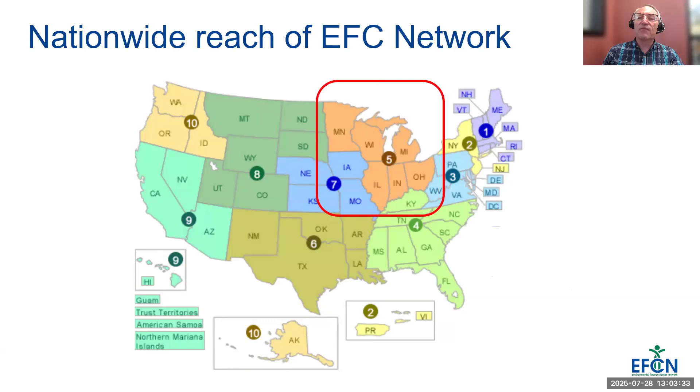This is part of a nationwide project, a collaboration between all of the environmental finance center networks, most of which are university-based, and they're all across the nation. Each region has at least one environmental finance center, and the Environmental Finance Center for Region 5 is located at Michigan Technological University, and our program is called the Great Lakes Environmental Infrastructure Center.

So what kind of topics are going to be in this scope of water quality in the distribution system? The distribution system, as we know, it's separate from the treatment plant.

However, it is affected by source water and by treatment as well. When we talk about the distribution system, we're talking about storage, mains, pumps, and possibly even wells in small groundwater systems. And we're concerned about protecting the water quality once it enters that distribution system from contamination.

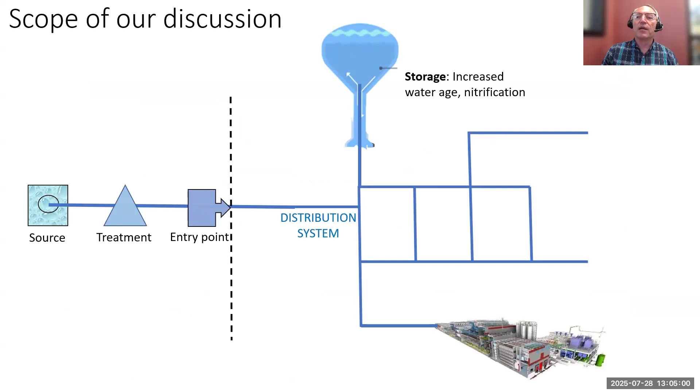If we look at the various types of things that can happen in a distribution system, we can see that we can have things like excessive water age or nitrification in a storage tank. We can have problems at dead ends with disinfection byproduct formation, and also water age, loss of disinfection residual.

In pipes, we can have challenges. We can have things like biofilm growing. We can have corrosion, leaching, and permeation in pipe materials.

There's also the topic of cross connections and backflow that can affect distribution system water quality, but also we're affected by source water quality. And even treatment processes can affect downstream water quality in the distribution system. We can have, for example, treatment give us changes in pH and alkalinity, and different types of disinfection chemicals can affect water quality in the distribution system.

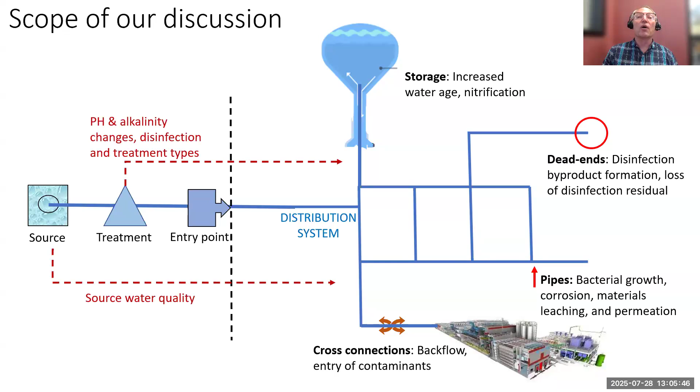Also, water age has a big effect on distribution water quality. And the kinds of things that we can look at is how long is water remaining in our storage tank? Do we have sufficient turnover? Are we flushing our system and working to eliminate or manage dead end water mains? The water quality in the distribution system is heavily affected by water age.

You can see in this little graph on the top right of your screen that has water quality ages, and that bottom graph of time is in hours. The performance index that different people in this study were looking at were things like disinfection byproduct formation, loss of residual, and they were trying to figure out what's a good way to monitor the performance or the quality of the water over time.

You can see that over time, eventually, if you didn't do anything to renew the disinfection residual or bring in new fresh water, that water quality would deteriorate. And it could be a number of hours or a number of days, and it depends on some factors that we'll cover today.

Some factors associated with water age: loss of disinfection residual, disinfection byproduct formation, the growth of biofilms, and interactions with different types of pipe scales. We'll talk about that today. Increase in bacteria counts and development of pathogens, corrosion and tuberculation in pipes.

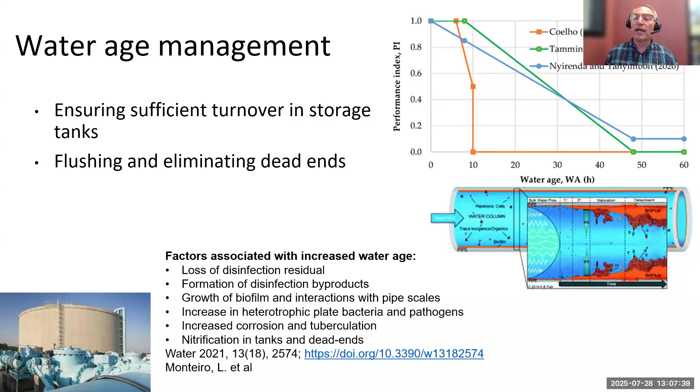Nitrification in tanks and dead end mains. On this slide here, there's a link to that study that I was referencing where that graph comes from up above. You'll have that in your slides.

Another issue is preventing the entry of contaminants, and there's a couple ways that contaminants can enter. It could be through some kind of cross connection where you either have back siphonage where there's a loss of system pressure, which either creates a suction or allows contaminants or unapproved water sources to enter the system, or you can have a situation where there's back pressure, where the customer has some kind of process like a boiler or pumps where the customer pressure exceeds the system pressure. Both of those can lead to backflow.

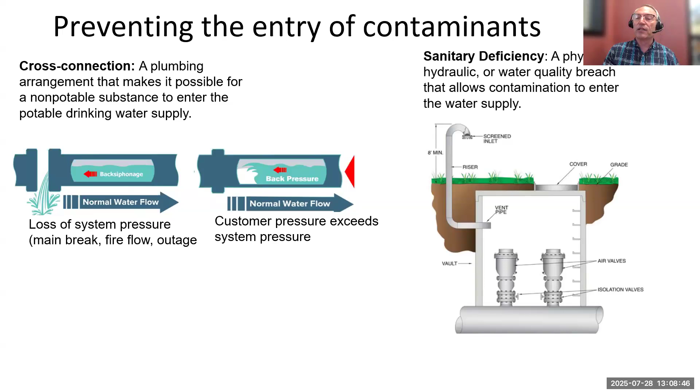Another category, a wide category, is sanitary deficiencies, some kind of breach in the water system that allows contamination to enter. A couple of examples would be air release valves in the distribution system. You see in this image here on the right of your screen, you have a screened inlet that allows air to be released or enter, and that would need to be protected from things like flooding or groundwater. Also, you could have something like a groundwater well that doesn't have an adequately sealed casing at the top or an adequate sanitary seal, which could allow contamination to enter.

There's also some factors with pipe materials. One issue is permeation, where contaminants like volatile organic compounds can pass right through the pipe wall. This graph here is showing us the types of events or the types of chemicals that have been associated with over 100 events that have been studied by the EPA over the last couple decades. Most of them, you can see 89% were due to gasoline or gasoline products.

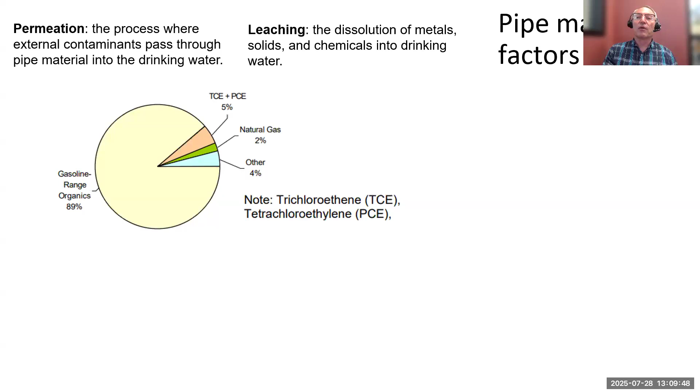Another issue is leaching, where leaching is the dissolution of metals in pipe materials, and things like linings and joints, where it allows those chemicals from the dissolution of those metals and solids to enter the water supply. That study where this image is from was from 1992, so they looked at 100 known permeation events at that time, and most were due to gasoline products from leaking storage tanks or out and out spills.

One example cited in this study was a simple 10-gallon gas tank that leaked onto a roadway and permeated a PE pipe. You can see the results where it resulted in benzene and toluene, components of gasoline products, significantly over the MCL. It went right down through the ground and into that pipe.

If you want to look more into this topic, there's an excellent EPA manual called Permeation and Leaching. I've listed it here on this slide, and it's also in your references document that Lori will share later.

There's some studies, but there's also some documents like this that are actual more like manuals. I would advise you to save those either in PDF form or print them out and put them in a binder and add those to your water quality library.

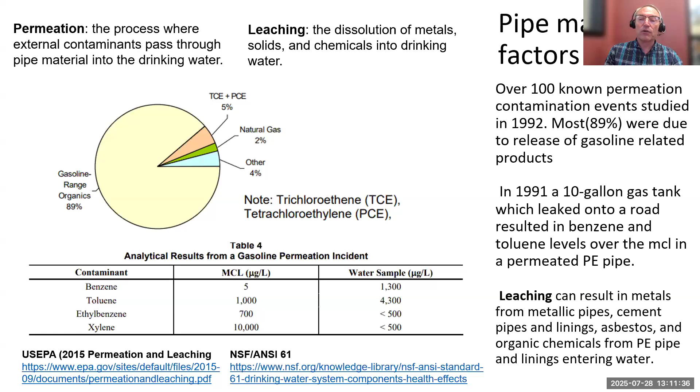Also, anytime you're dealing with pipe materials or any kind of materials that come in contact with water, a good thing is to keep in mind the NSF 61 standard, which talks about drinking water system components that come in contact with water.

So you can see that we need to have sanitary procedures when we install or repair water mains, because the surrounding water and soil can contaminate the distribution system.

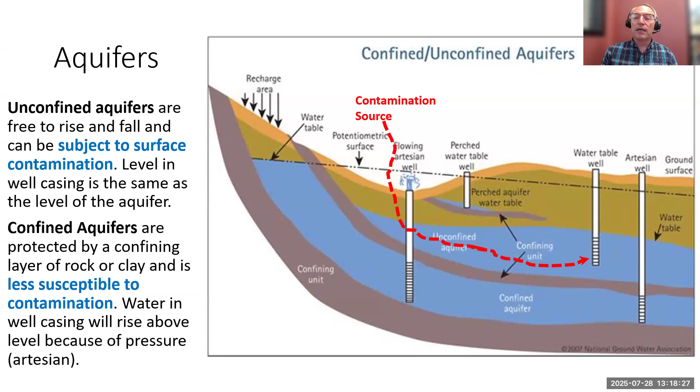So confined aquifers are a little more protected. If we had some contamination on the surface, it could possibly percolate down right into that unconfined aquifer. But notice it goes right by that flowing artesian well drilled into the lower confined aquifer, and it's not making its way through that confining layer.

In a surface water source, you have the concept of a watershed, and eventually all this water quality makes its way, if it's not removed in treatment, into the distribution system. That's why we're talking about this. This is a situation where the water is exposed to a much greater degree to contamination that occurs on the surface. As you look at a watershed, you're looking at where the water comes from and where it runs off to enter that particular water source.

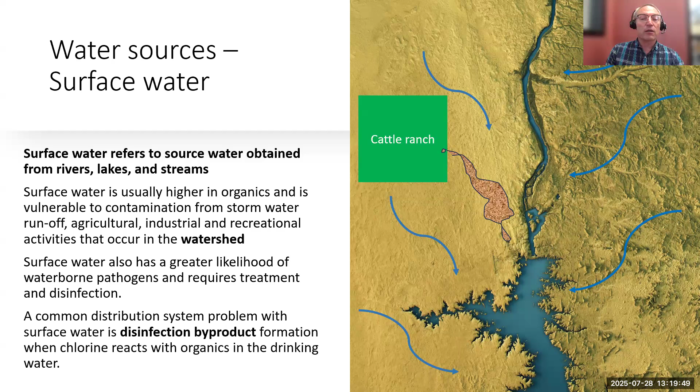These blue lines show how water is flowing toward that river and possibly a reservoir. If we had a source of contamination, such as a cattle ranch, an industrial facility, or a community with runoff, and some kind of waste was released, it could directly enter that water source and result in natural organic matter, for example, or toxins being introduced to the water supply. Natural organic matter, as Daryl will talk about in a bit, can be associated with the formation of disinfection byproducts.

If we look at general water quality parameters, we're looking first at general quality parameters like pH, alkalinity, and the chemical constituents, to see how it's going to affect the downstream user. We also have three basic categories of pathogens we pay attention to: viruses, bacteria, and protozoa. Finally, we're looking at other factors that affect water quality, like water age, the precursors or formation of disinfection byproducts, system materials, upstream treatment methods or lack thereof, and also our practices within the distribution system.

Looking at some of these in more detail: pH stands generally for the potential of hydrogen, and it's based on how hydrogen exists in the water. At a pH below 7, hydrogen exists as a positive ion, and it's considered acidic. If water is acidic, it can promote corrosion, meaning stripping of electrons from metals. If water has a higher pH, it means the hydroxide ion, a negative ion, is predominant, and that's considered alkaline or basic, which can contribute to scale formation.

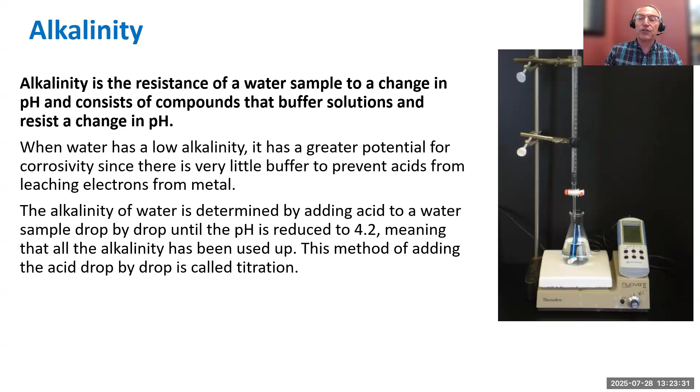Hardness is another water quality measurement that can affect the distribution system. It's the concentration of dissolved minerals, specifically minerals such as calcium and magnesium, and these are the minerals directly responsible for scale development inside pipes and hot water heaters.

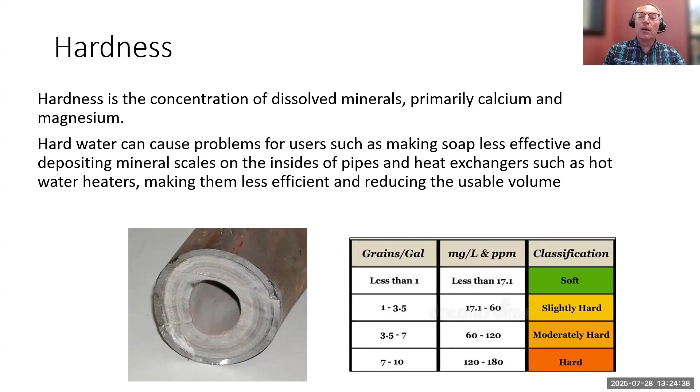If we look at overall dissolved solids, this is more of a general term, which can include those hardness minerals, but TDS can also mean a high content of all types of minerals, including salts. So if we had a high TDS that consists of a lot of salts, it could actually be corrosive.

When I was working in the Montana and North Dakota area, we had some neighbors that had water with a TDS of about 3,500, and it was completely undrinkable. This was just a home, but their entire basement was a water treatment plant that included filters and softeners, and they had to treat it before it even entered the softener. So if that TDS includes a lot of salts, that could increase the conductivity and corrosivity of water.

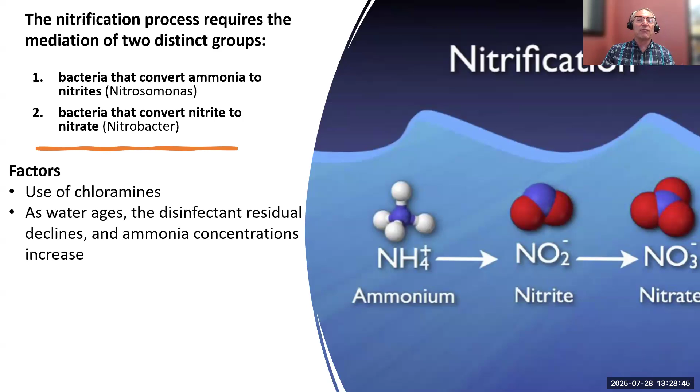Some of the factors are a system that uses chloramines or has a high ammonia level. If the water stays in there a long time, the disinfection residual declines and releases some free ammonia, and these nitrifying bacteria consume that. It's also increased with warmer temperatures, and it can facilitate the growth of bacteria, especially where biofilm and sediments exist if the tank isn't cleaned properly, providing a protective environment for these microorganisms. What you get is a positively reinforcing situation where you continue to lose disinfection residual and increase the levels of nitrate.

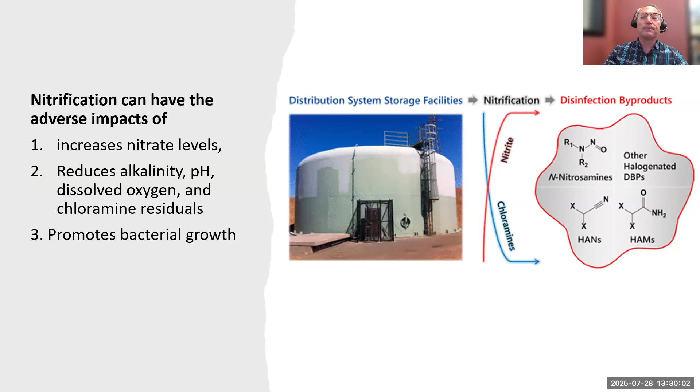The ultimate effect of nitrification is higher nitrate levels, but it also reduces the alkalinity. It uses up alkalinity, lowers the pH and dissolved oxygen levels, further reduces the chloramine residuals, and promotes bacterial growth. So now you have a situation with an acidic tank, toxic nitrate, and bacteria growth out of control because the chlorine residual is gone. It's a bad cycle to get into.

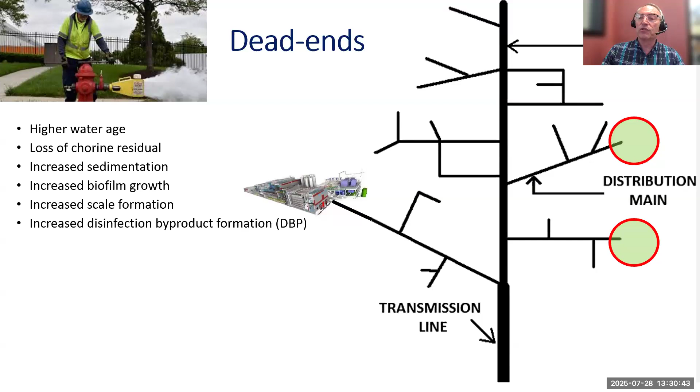Just because we see a dead end doesn't necessarily mean it's low water use. There might be a large water use or a whole community at the end of the dead end, but dead ends that don't have any water use can cause water quality problems.

There was a study done in 1996 by a gentleman, Mark LeChevallier, who's done a lot of studies with AWWA. He found that in systems with dead ends having chlorine residuals less than 0.2 milligrams per liter, or chloramine levels less than 0.5, it can actually affect the entire system. These systems had more coliform occurrences system-wide than systems with higher residuals at these dead ends.

You see a gentleman here at the top left flushing. It looks like he's doing a full velocity flushing here, but at these dead ends, just gentle flushing to move out some of that water and bring in fresh water can help a lot.

There can be a detachment from the biofilm, releasing sections or pieces that can interact with chlorine. It can also float down and reestablish another growth of biofilm further on down the main, in another part of the distribution system.

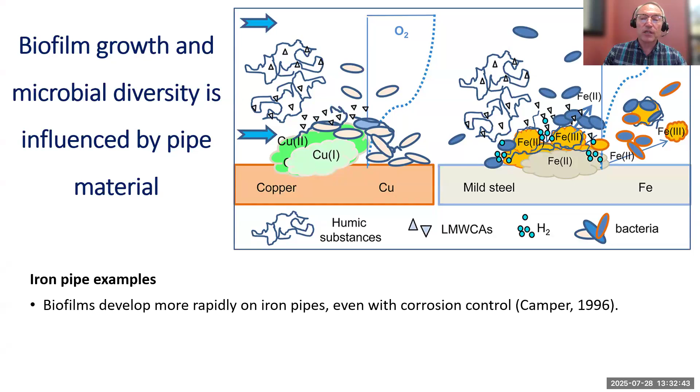The growth of biofilms is actually influenced by the type of pipe material. Iron pipe is one of the problem types for biofilms, because biofilms grow more rapidly on an iron surface and have greater diversity compared to PVC pipes. PVC pipes have fewer problems with biofilms. It also can affect disinfection; for example, iron pipes can have a greater chlorine demand.

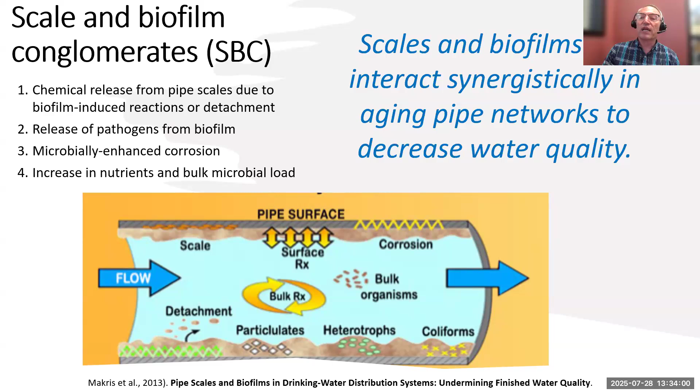The biofilm can also work synergistically with scales, and it can cause a lot of problems that impact water quality. So we'll be talking about biofilms off and on with different topics today. Some issues: pipe scales might release certain chemicals, influenced by biofilm reactions such as detachment, where they move those chemicals around. Biofilms can release pathogens as they disperse, and corrosion can be enhanced by biofilms. Also, increasing overall nutrients and natural organic matter, and the bulk microbial load can be influenced by biofilm growth.

One of the most insidious things about biofilms is that it can protect pathogenic microbes from things like chlorine and even from flushing.

The kinds of topics we're going to be looking at next are the types of pathogens. We already mentioned the three categories of pathogens. There's bacteria, and an example is E. coli. E. coli O157 is the bacteria we're most concerned with. Viruses such as flu viruses, and also protozoa like Giardia that can infect humans.

As we're about to transition to disinfection, we think about the goal of having a negative coliform bacteria test. We use coliform bacteria as an indicator organism. Why do we do that? We're looking at total coliform, which includes all these other types of coliforms, different types of fecal coliforms, different types of E. coli, and of course the pathogenic E. coli. There's two things: the presence of just coliform bacteria can mean that we have some type of contamination that's been released into the water, and that contamination could mean that we also have different types of bacteria, viruses, and protozoa.

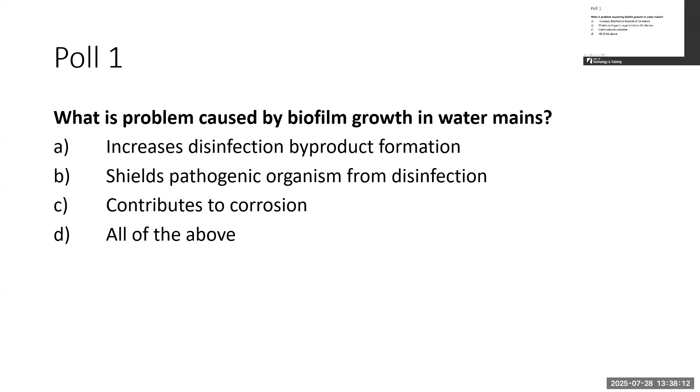Are we getting anything, Lori? We have 82% of people have answered, and right now we have 81% saying D, all of the above. Okay, all right, let's see - the answer is all of the above. So 81% of the people are correct.

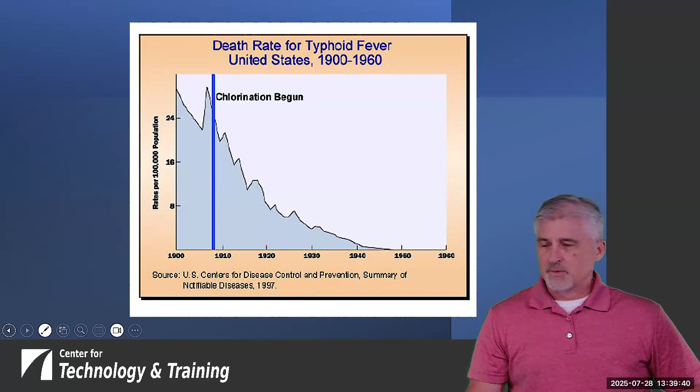So why is chlorine important? If we look at this graph here, it shows incidence or death rates from typhoid fever, and you can see that since chlorination began, there's been a steady decline. Obviously there's a few other factors that come into play - you'd like to think that sanitary measures in general are going to be better - but it shows the importance of chlorination. So there's three main types of disinfection, three different ways that we get disinfection.

One of them is gas chlorine - you'll note that that's 100% strength. There's also liquid chlorine known as sodium hypochlorite, which is typically anywhere from 5.25% to 12.5% strength or concentration. Those come in liquid, usually plastic drums of some sort. We also have calcium hypochlorite, which is a solid, at 65% to 70% strength. That's going to have to be mixed with water to create the chlorine.

And these are commonly called pucks.

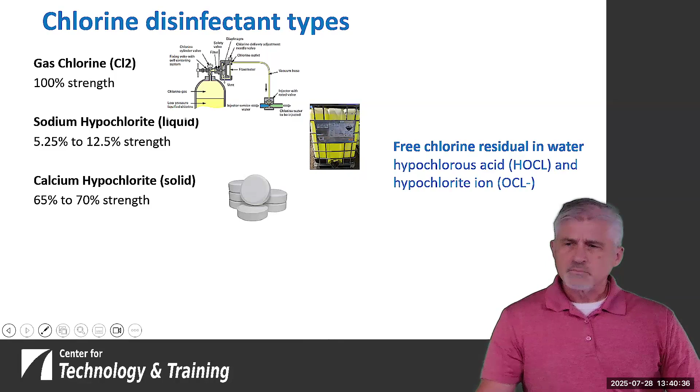Free chlorine residual in water is made up of hypochlorous acid and hypochlorite ion.

Our fourth type, chloramines, is 5 parts chlorine and 1 part ammonia, and it's measured as a combined or total residual. Chloramination is when we take ammonia and add it to water that's already been treated with chlorine. The added ammonia reacts with the hypochlorous acid in the water and forms a long-lasting disinfectant.

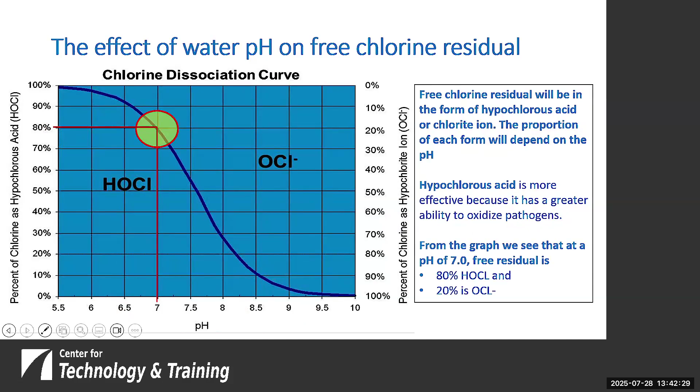Free chlorine residual in the form of hypochlorous acid is a little bit better because it's stronger and has a better ability to oxidize pathogens. If we look at our point here, we're at a pH of 7, we've got 80% hypochlorous and 20% hypochlorite.

We get to a point where we're starting to produce chloramines, so we're starting to get some benefit from the chlorine. Chloramines tend to have that odor we quite often see when adding chlorine to water, and we get a lot of complaints from the odors. There's a point where we're adding chlorine and people don't really like it.

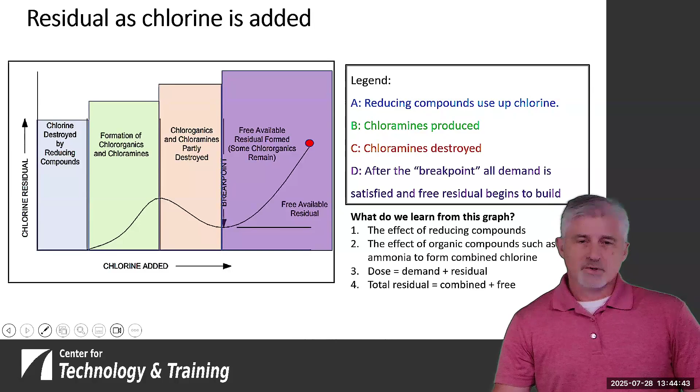Here we're showing the combined residual and the free residual. The whole thing is considered our total residual.

Here's another case where we're putting some numbers to this. Say we had 0.2 milligrams per liter, or parts per million, used up by the reducing compounds. We got 0.3 for combined, giving us a free of 1 in our chlorine dosage of 1.5.

So dose equals demand plus residual. What dosage should be applied to a drinking water with a total demand of 0.4 milligrams per liter if the intended free residual is 1.2 milligrams per liter? The solution: we simply add the demand and the intended residual, in this case 0.4 parts per million demand plus 1.2 parts per million residual, to give us a 1.6 part per million dose.

This is an important formula that we're going to use: pounds per day. The pounds formula gives us pounds per day when we take our flow in million gallons per day, multiply that by our dosage in milligrams per liter or parts per million, and then multiply it by the weight of a gallon of water at 8.34 pounds per gallon.

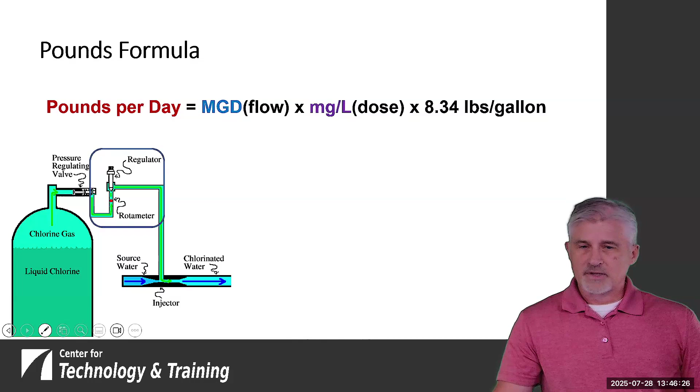The rotameter is going to show what it'll provide us, how much we're applying in pounds per day. So that helps us make sure that we're providing the right amount of chlorine in chlorine gas.

All right, so let's look at this again. What is the feed rate setting for chlorine gas in pounds per day if the plant flow is 1.2 million gallons per day and the required dosage concentration is 1.5 milligrams per liter or parts per million?

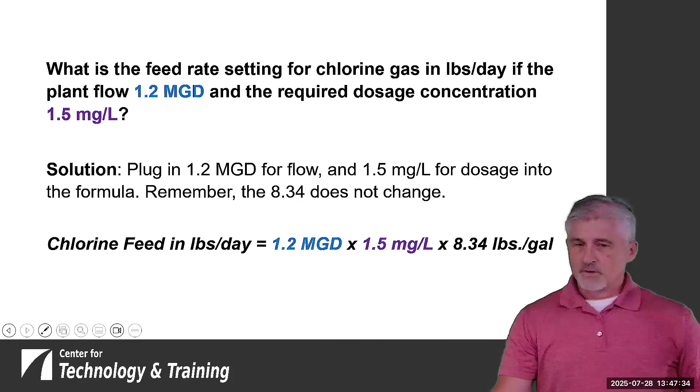So our solution, we're going to take that 1.2 million gallons per day for our flow and our 1.5 parts per million for dosage into the formula. The 8.34 doesn't change in this case because with gas chlorine, it's 100% available. So chlorine feed in pounds per day is equal to 1.2 million gallons per day multiplied by the 1.5 milligrams per liter dosage and the weight of water. So we multiply those out, we'll get 15 pounds per day. So we want to apply 15 pounds of chlorine gas per day.

So now for liquid chlorine or sodium hypochlorite, our formula is a little bit different in that we're going to take our gallons per day, and that's going to be equal to the million gallons a day multiplied by the parts per million or milligrams per liter, and then multiplied by the weight of water at 8.34 pounds, giving pounds per day. And then we'll multiply or divide that.

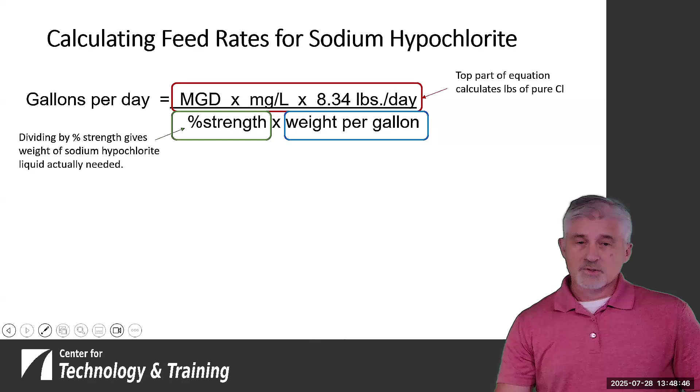So the top gives us the pure pounds of pure chlorine if we were to actually use just chlorine. In this case, it's a certain concentration or strength, and I think we said that was anywhere from 5.25% to 12.5%. We multiply that by the weight per gallon, and that's the weight of liquid chlorine. So that's divided in our equation. And then you see that, so that's that formula.

So we'll go to another problem. What is the feed rate for 12.5% sodium hypochlorite with a specific gravity of 1.2, so it's heavier than water, when the plant flow is 0.5 million gallons a day and the dosage is 0.9 parts per million?

So we're going to throw that stuff into our formula. We have gallons per day equals flow in million gallons per day times the concentration times the weight of water, divided by the percent strength or concentration multiplied by the specific gravity and multiplied by the weight of water again. Plugging those numbers in, we have 500,000 gallons a day, 0.9, 8.34. We convert 12.5 to 0.125, and we put in our specific gravity. We come out with roughly 3 gallons per day.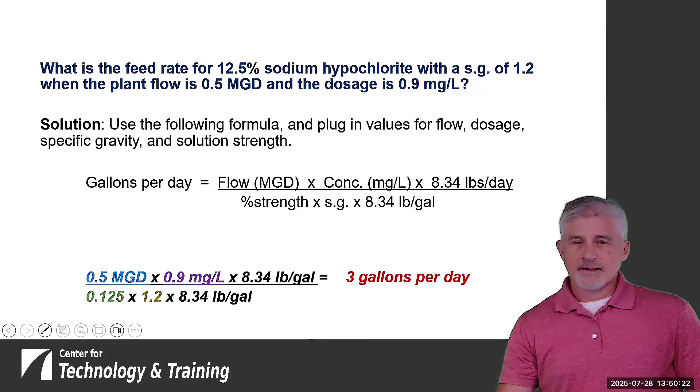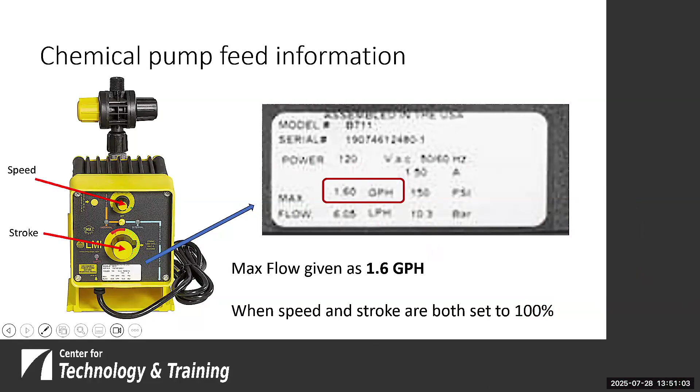So that max flow is when the speed of the pump, how fast the pump operates, and the stroke, which is either the length of the diaphragm or of the piston, how far it is, are based off of 100% for both.

So if we want to calculate the output of a chemical feed pump, in this instance we look at a chemical feed pump that's rated for a maximum flow of 1 gallon per hour. What is the actual output of the pump if both the stroke and the speed are set at 70%?

We're going to use this formula. We take the actual output equals the maximum output, 1 gallon per hour, times the percent of the stroke, which we said is 70%, times the percent of the speed, which is also 70%. We'll convert those 70% to 0.7. If we throw those numbers in, we get a little under 0.5 gallon per hour. So that tells us that at 70% stroke and 70% speed, we're about half the maximum output of the pump, which gives us a little bit of room either way.

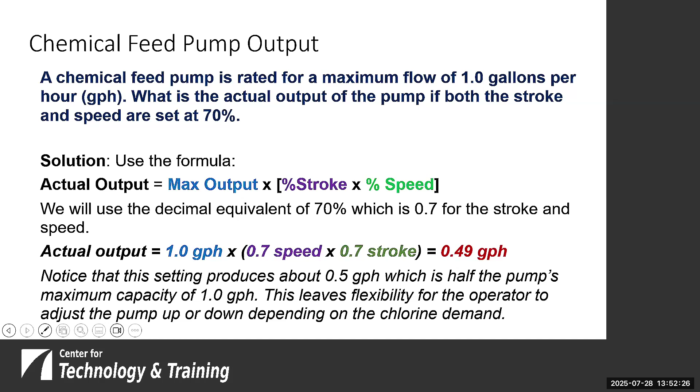If we need to increase or decrease, we can lower the speed or we can lower the stroke and actually operate that pump the way it should, to the point where we need it to operate.

So we've got a poll. What is the feed rate of gas chlorine in pounds per day if the water flow is 0.2 million gallons per day and the dosage is 1.2 milligrams per liter? Your options: A is 1 pound a day, B is 2 pounds, C is 3 pounds, and D is 4 pounds per day. Give people a little bit of time.

You're getting close to half, I think, of the responses. Looks like it's right around half.

Well, let's take what we got here. Right now we got 68% of the people are saying 2 pounds per day, and that is correct.

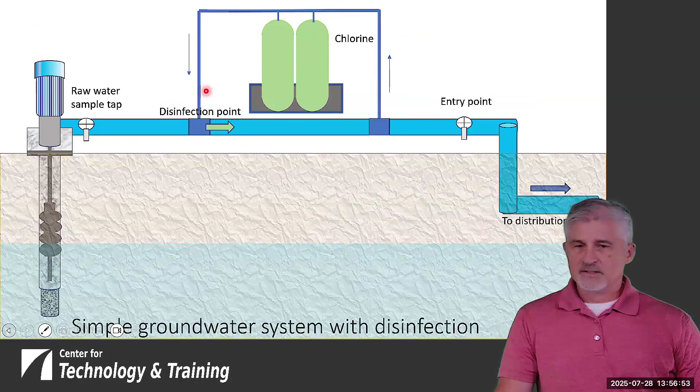So we've got this simple groundwater system with disinfection diagram. We're applying disinfection at this point right here, because the water comes up, goes through the pump, chlorine gets added here, it goes out into the distribution system. So from this point forward, what's the time of flow in the pipe to the first service connection? That's going to be beyond.

This is the entry point. That's typically the end of the treatment plant or well house. The first customer is going to be out here, the first service connection. So we're trying to find out what that time is.

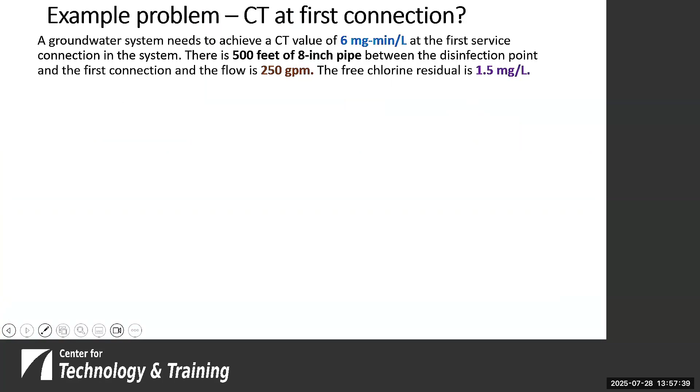So we'll do an example problem, trying to determine the CT at the first connection. It's going to be a longer problem. So we have a groundwater system that needs to achieve a CT value of 6 milligram minutes per liter at the first service connection in the system.

There is a 500-foot 8-inch pipe between the disinfection point, which we go back here, and the first connection. That's the first customer that is going to potentially receive this water. The flow is 250 gallons per minute, and the free chlorine residual at that point is going to be 1.5 milligrams per liter.

So if we convert the flow from GPM to CFS, that's going to help us work through this problem. We do that by dividing our 250 gallons per minute by 7.48, and we also divide it by 60 seconds per minute. That'll give us a cubic feet per second of just a little over a half, or 0.557.

Next thing we want to do is we want to get our units into feet.

We want to get from inches into feet, so we divide 8 inches by 12 inches per foot. That gives us 0.67 foot of diameter for our pipe.

We find the circular cross-section area of the pipe in square feet. We use pi r squared, but in this case we're using diameter times diameter times 0.785. We plug the numbers in and come up with 0.35 square feet.

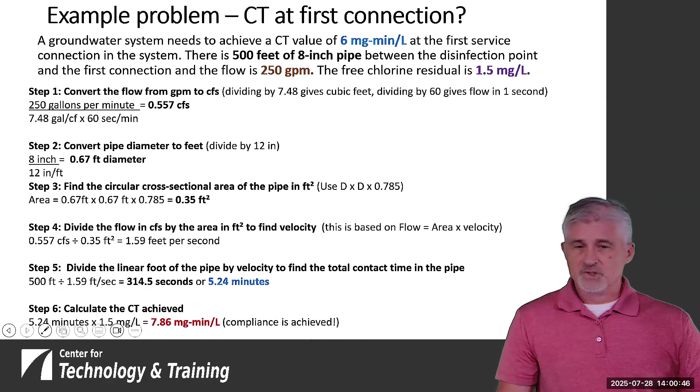Now we need to know: did we meet our CT requirements, our contact time requirements? If we take our 5.24 minutes and multiply by the concentration of the free chlorine residual, we get 7.86 milligram minute per liter. Compliance is achieved because we were aiming for 6, and we have more than what is required.

Next, we'll talk a little bit about disinfection byproducts. What are disinfection byproducts, and how do they form? This is a simple diagram.

It shows that you've got rainfall, it goes across organic materials. Quite often we'll see in those situations water that comes out with tannins in it, or it's brown in color potentially. That water is taken into a treatment plant where most, but not all, of the organics are removed. It may look like everything's gone, but quite often we can't quite get everything out.

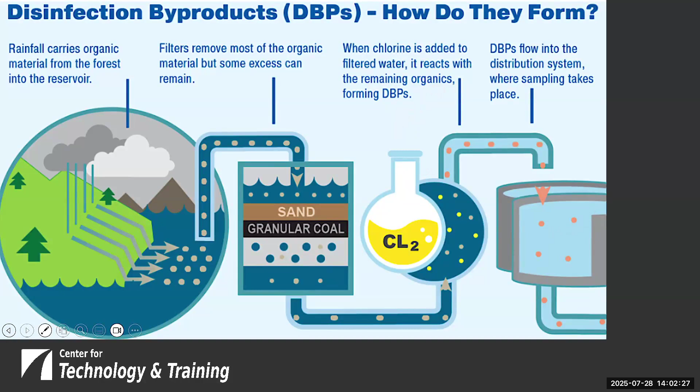So as part of our treatment, to protect our water, we're going to add chlorine to the filtered water. But the downside is it's going to react with that water. The chlorine reacts with the organics remaining in the water to form these disinfection byproducts. The water flows out of the treatment plant into the distribution system, and that's where we're required to collect our samples and determine whether we have compliance with the disinfection byproduct rule.

So what are disinfection byproducts? They're made up of a couple of things. One is the total trihalomethanes, these 4 compounds. They're volatile organic compounds found in drinking water, and it was determined that they pose a cancer risk if they're over the MCL of 0.080 milligrams per liter.

THMs, or TTHMs, are formed in a reaction between naturally occurring organic matter and chlorine. Haloacetic acids, or the HAA5s, are 5 different weak acids that were also found to pose a potential cancer risk when found over the MCL of 0.060 milligrams per liter.

So both the THM and HAA5 compounds are the result of reactions with naturally occurring organic materials and the decay products of plant and animal materials.

Compliance for THM and HAA5s in drinking water is determined by the locational running annual average, calculated at each monitoring location. That average is the average of the 4 most recent quarters of monitoring data at specific locations. We have to meet them at each one of the locations we have out there. Some systems may only have 1 location, others, larger systems, are going to have multiple.

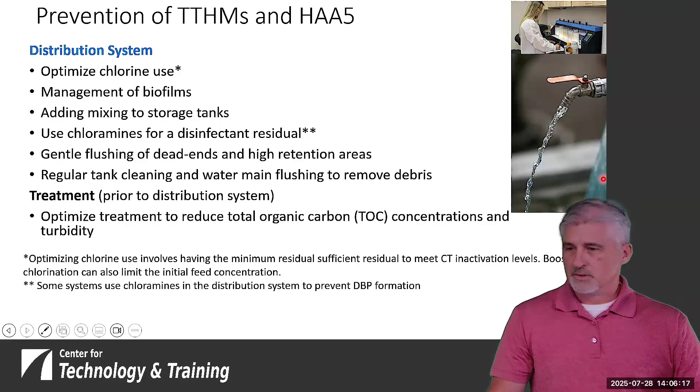Some systems use chloramines in the distribution system to prevent DBP formation. Systems that have issues with THMs and HAAs may move to the use of chloramines, because it does help with that.

There's a link to the DBP, Disinfection Profiling and Benchmarking Technical Maintenance Guidance Manual. There are several links throughout these presentations, and I encourage people to look at these. I would think these would be documents from EPA that everybody should maintain in their library.

So we've talked about flushing and water age. What are some of the effects of increased water age? This study looked at the effects of residence time on water quality in distribution systems. Researchers found that in areas with low velocities or flows of water, HPC growth and the levels of THMs continue to increase with water age, regardless of the presence of normal chlorine residuals.

Even with normal chlorine residuals, you're still going to see an increase in THM formation. Typically, chlorine residuals decrease with water age anyhow, so the amount of residual generally goes down over time. They're also highly affected by water temperature. On this graph, a CFU is a colony forming unit, observed per milliliter. As our retention time in hours went up, so did the number of HPCs found. An HPC estimates the number of bacteria, yeasts, and mold in the water -- it's an indicator of water quality.

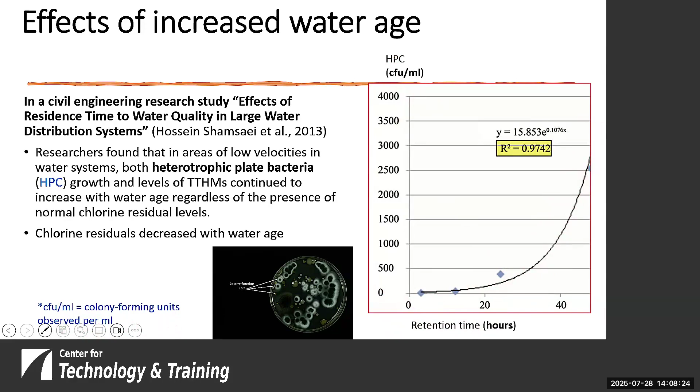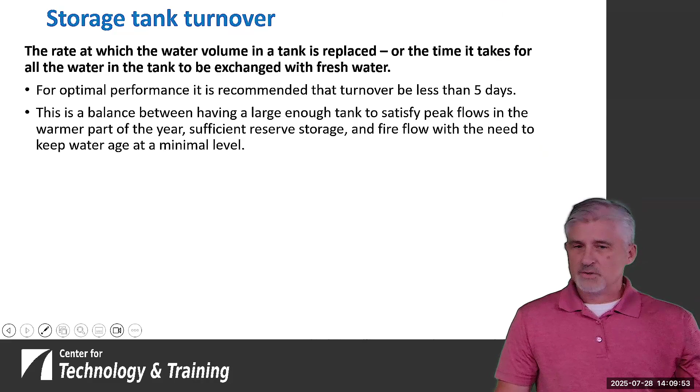What effect does the storage tank have on THM and HAA formation? The rate at which the water volume in the tank is replaced can definitely affect it. If we were running our system properly, we'd recommend that water turns over less than every 5 days or so. But there's a balance -- we want enough water in storage to meet our peak flows and fire flow needs, but we also want to keep the water at a younger, lower age. We don't want it sitting out there forever.

Let's take an example: we have a 500,000 gallon storage tank, and our flow is around 175,000 gallons per day. So what's the turnover? We'll do everything in gallons -- convert the 500,000 gallon tank volume, and divide it by the flow of 175,000 gallons per day, and that tells us how many days it takes for the water to go into the tank and then come out.

But does it actually happen that way? No, typically not -- each gallon of water that comes in doesn't spend the same amount of time in the tank as the gallon before or after it. So with tanks, we have what we call short circuiting. The water we put in doesn't necessarily flow and mix throughout and then come out at the end. Often the water coming in is cooler than the water already in the tank.

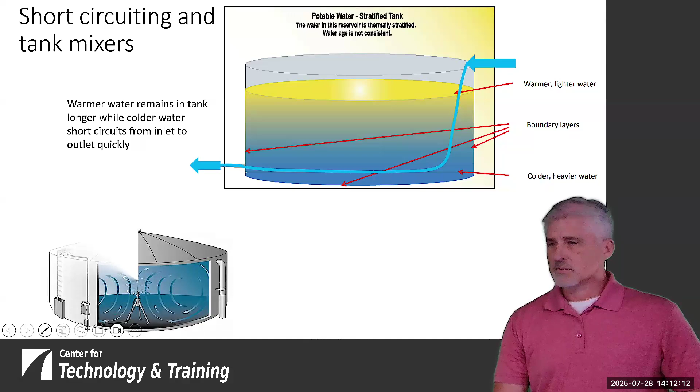We could have baffles, things that move the water around, whether it's an impeller or propeller in there to move the water around. You could put air in there, bubblers to move the water around. I know in some of the systems that I oversaw, we had them put in a pipe that directed the water so it would go circle around at least the tank and hopefully provide some mixing.

Tank mixers can be very helpful to limit the amount of water age. And by limiting water age, we're hopefully limiting the amount of disinfection byproduct that we produce.

So let's look now into biofilms and what effect disinfection has on them. Greg had talked about biofilms, so you imagine this little film that forms on the pipe. Well, there are naturally occurring organic materials that are in the water, and there's chlorine in the water, and so those are going to affect each other.

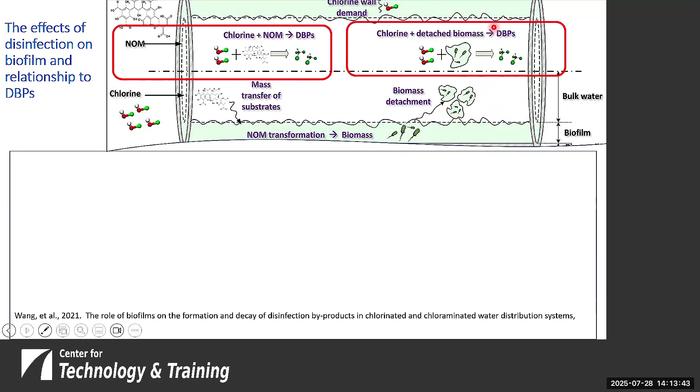When chlorine and NOMs come together, they form DBPs. So there's the potential that the water you're putting in is forming it. And the chlorine will react with this, if there's biomass that becomes detached, that'll also form DBPs. In a recent study, low DBP formation was observed with a chlorine residual of 0.5 milligrams per liter. When the chlorine residuals were increased to 2 milligrams per liter, however, the DBP concentrations increased sharply and then decreased after 2 weeks. So what might have happened?

Chlorine can reduce biofilm growth rate and even destroy biofilms, but it makes disinfection byproducts. So we want to kill our biofilms off, but in the process, we're likely to cause DBPs to be formed.

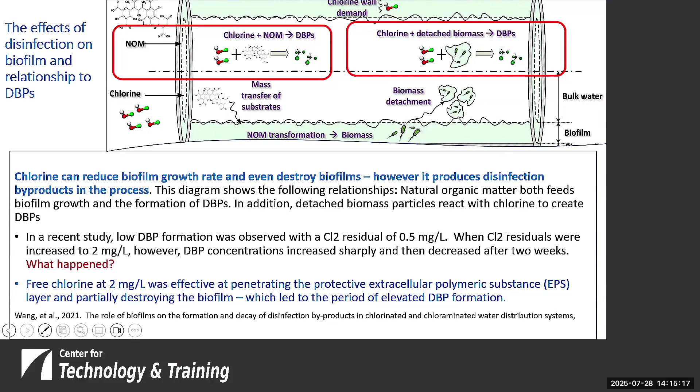With free chlorine at 2 milligrams per liter, it was effective at penetrating the extracellular polymeric substance, that's like the layer that protects that biomass. So at 2 milligrams per liter, which is a pretty healthy dose of chlorine, you're able to get through that and partially destroy the biofilm, and that led to a period of elevated DBP formation. But the goal is that you get an elevated level, and then through time you're able to get rid of the biomass and move forward, so you have higher DBP formation to end up getting lower.

So what effect does pipe material have on biofilm growth? If you look at PVC water mains, chlorine achieves a greater level of inactivation of organisms in biofilms than chloramine. So the thought being that chlorine is potentially better in PVC water mains. A concentration of 1 milligram per liter of either free chlorine or chloramine has been shown to reduce HPC and coliform by more than 2 log in biofilms.

Now if we want to look at iron water mains, especially those that aren't coated or lined, we quite often see greater chlorine demand. With iron water mains, free chlorine residual as high as 4 parts per million has shown to be ineffective. So even at high levels in iron water mains it may not work, and that could be due to the fact that especially cast iron water mains that aren't lined have a lot of area to potentially grow biofilms. On the other hand, monochloramine residuals greater than 2 milligrams per liter have been shown to be successful in iron pipes. So once again, this just demonstrates the need to have the right type of disinfection for your situation.

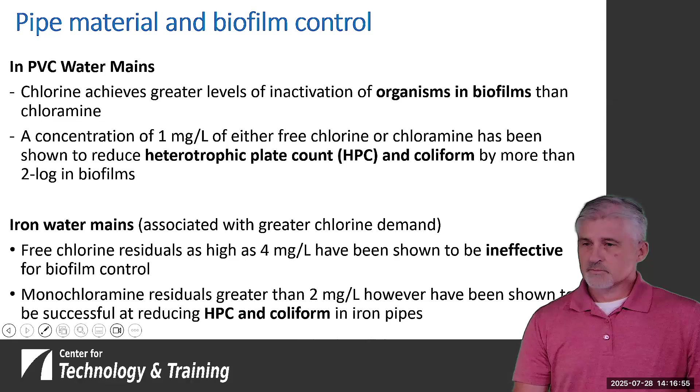So we have another poll here. Poll 3: what are the factors that can lead to increased disinfection byproduct production and loss of residual? A, high tank turnover and excessive flushing. B, low tank turnover and sediment buildup. C, use of chloramines and system flushing. Or D, all of the above.

We'll give you all a little bit of time to respond to the poll. I think we got answers coming in a little bit quicker on this one. We didn't have to do a lot of calculations at least. Yeah, we're over half already. People are flying through this one.

All right, let's see. What about 3/4? We're close to 3/4 of the way through.

Well, let's look at the answer here. I can say that at this point, 59% of the people have said B, 36% said D, all the above, and we've got 5% at C.

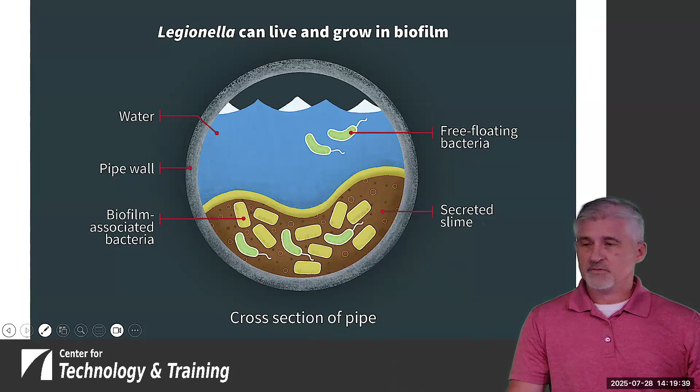So this slide just shows - we have Legionella as one of the things that can be of concern for water systems, and this just shows what it might look like. Obviously your biofilm is not that thick, but this is all just for dramatic effect, to point out that Legionella is one of the things that can grow and live in biofilm.

So what are mixed oxidants? Mixed oxidants are produced on site by electrolysis of sodium chloride using direct electrical current in a brine solution. We've got a process here with anodes and cathodes, cations and anions, creating a mixture of disinfecting compounds - the hypochlorite ion, hypochlorous acid, and chlorine that result from this process.

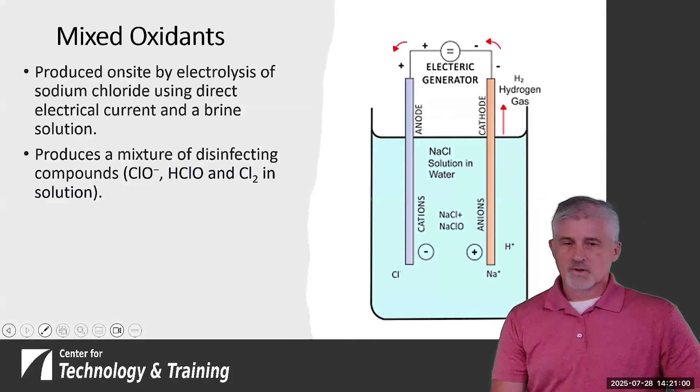So it's helpful, and it's just another way that, in the right circumstance, you may find this is the best way for you to provide disinfection, chlorination, and meet your disinfection byproduct requirements.

So what different strategies are out there? One study found that neither chlorine residuals nor chloramine residuals were able to control biofilm development. But when they used a combination of free chlorine followed by monochloramine, the biofilms were controlled. So several factors need to be taken into consideration when looking at disinfection byproducts, such as what pipes you have in the system, whether you have an issue with biofilms, what your water quality is like, and how your system is designed.

So we had a question about sound - are we good? We're still good.

Okay, thank you. So I'd like to give a word of warning that anytime you have any changes in disinfection strategy, you need to thoroughly investigate them and pilot test. Any changes you should be contacting your primacy agency, whether you need to get their approval or potentially you might need to get a permit. Make sure you don't go and do something and then regret it later.

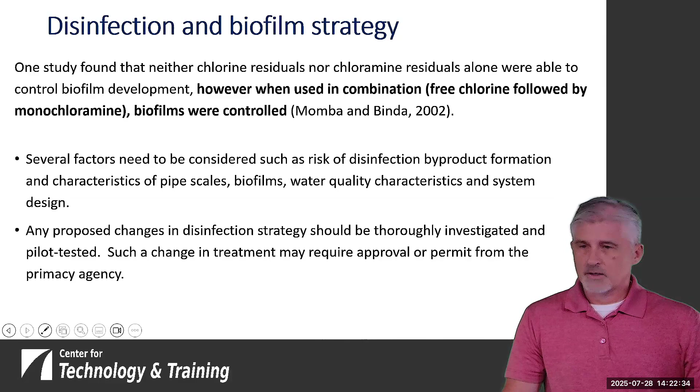Some of the insights - one would think, does shock chlorination improve the removal of biofilm? Just a high dose of chlorine, throw it at it. Well, the study showed that shock chlorination with liquid chlorine did not improve the impact of mechanical cleaning on biofilm removal. So it didn't help in that case.

However, high velocity flushing followed by chlorination appears to be one of the better ways to emergency disinfect water mains. This follows closely with the AWWA standard for when we install pipe - we always require flushing prior to chlorination. It doesn't seem like chlorination before flushing does what we need it to do. After high velocity flushing, biofilms are significantly reduced, and the EPS layer that protects microbes from disinfection is compromised, which allows the chlorine to disinfect more effectively.

Flushing before chlorination. All right, so now we're on to Greg with flushing, repairs, and emergency disinfection.

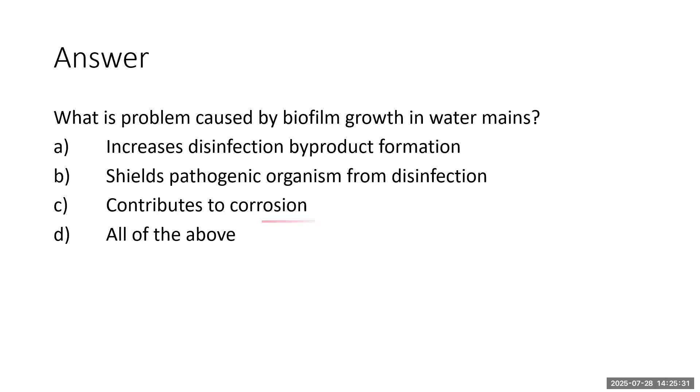I'm seeing a lot of fives, Lori. Do you have your timer ready? Oh, somebody said 10. We might have to add 10 plus 5 and make it 7.5. Okay, we have some 10s in there too, so if anyone needs a 10, I'll make it your call, Lori. 10 is fine with me either way. Okay, why don't we go ahead with the 10, and I'll start that right now. You should be able to see the timer at the top of your browser or your Zoom window. We'll see everybody on the other side of that 10-minute break. Okay, thank you.

Okay, here we go. Thank you for that timer, Lori. That really helps to keep us all on the same page.

Did you all enjoy that presentation from Daryl on disinfection and disinfection byproducts? I thought some of those situations and studies were kind of fascinating. If you enjoyed that, let us know in the chat if you have questions, because sometimes we learn stuff and it causes us to have more questions than answers.

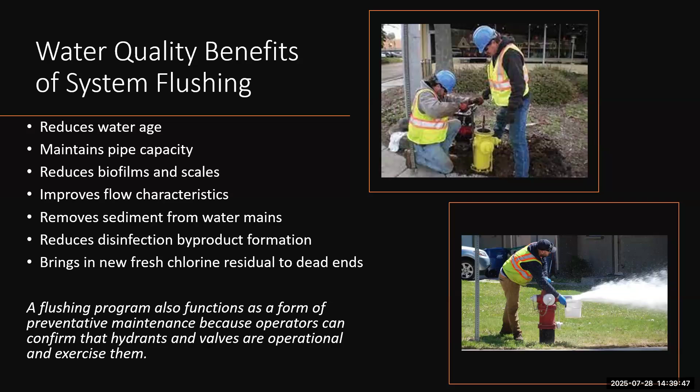Hydrants are important for public safety for more than just cleaning the distribution system. They're there to fight fire, for example. So having an excuse or reason to get around and operate the hydrants and valves is good. You want to make sure everything's functioning.

There was a study on different types of flushing modalities, and there's more types of flushing than just the standard methods we normally use. Opening hydrants and operating valves to get the water flow going in a certain direction and get the velocity up high enough would be hydraulic flushing. We would call it unidirectional flushing. That's one of the methods.

A second method is ice pigging. They use an ice slurry of salt water and send that through the distribution system, and that has a much greater ability to shear off slimes and scales in a piping system. It's a much more efficient way of cleaning.

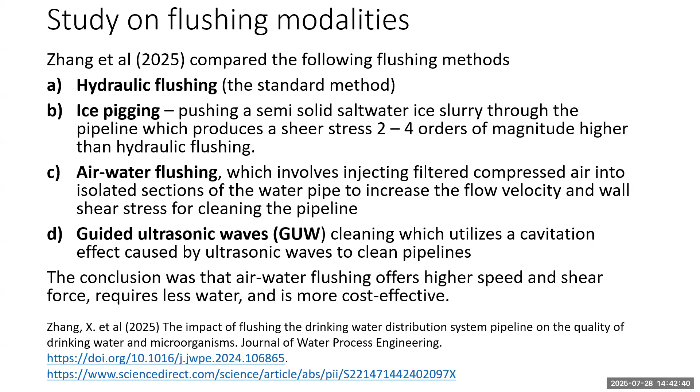There are also methods of sending large sponges or projectiles through the water system, called pigging and swabbing. A swab is a big piece of foam, and a pig is a little bit more rigid. It might have different types of abrasives, bristles, or raised portions to facilitate greater cleaning.

You can see a few slides here that I snipped from an AWWA video, and I'll put the link at the bottom of the screen.

They insert the pig into a hydrant, close up the hydrant, and connect a pump or some kind of water force, pushing the pig through the distribution system, cleaning as it goes. They might go from hydrant to hydrant, and finally they retrieve it when it comes out. Those are very effective.

They also have pigs they call analytic, which can collect data about the water main on the way through, for example some kind of acoustic testing that can determine the thickness of the main at various sections.

Here's that link from the AWWA video. It's just a 4-minute video, I think, but I have the link there for you, and it'll give you some insight.

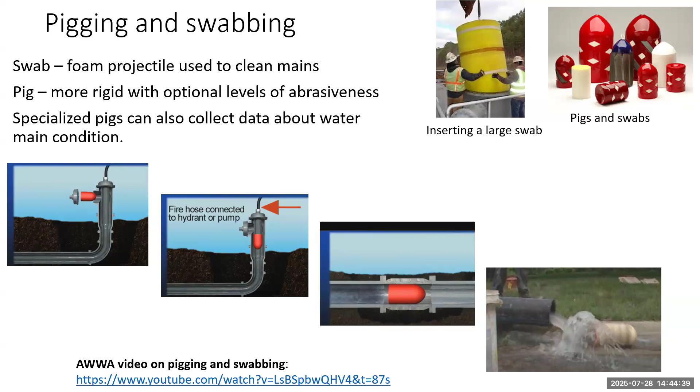Here's an image of a couple operators inserting a pretty large foam swab. It looks like the size of a large foam bedroll you'd use for camping, pretty big. And here's an example of a vendor's selection of different types of pigs and swabs, all different types. The middle one with the blue top has some abrasive material on the sides.

Another advantage is it's not going to get stuck. Pigs and swabs can go through the distribution system and hit a valve or a curve and get stuck, but the ice pig will just melt, so you won't have any problem with that.

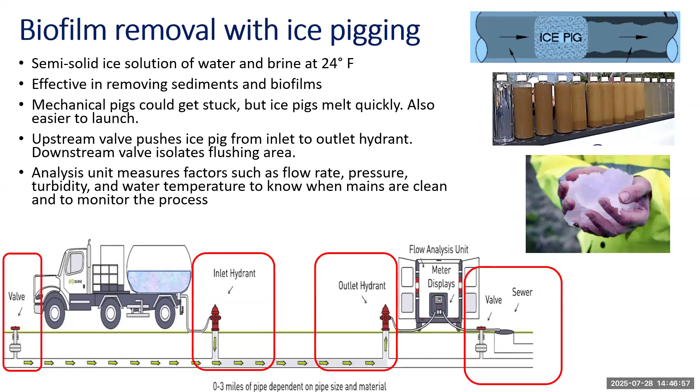Now, when you're using hydraulic flushing, you have this minor problem that if you have loops, the flow can travel in multiple directions. You open a hydrant at a certain location in the distribution system, and we don't know exactly which direction the flow is going. We have to use valves if we want to direct that water and get maximum velocity for a given flow. If we just use general flushing, opening hydrants without valves, we won't have sufficient velocity.

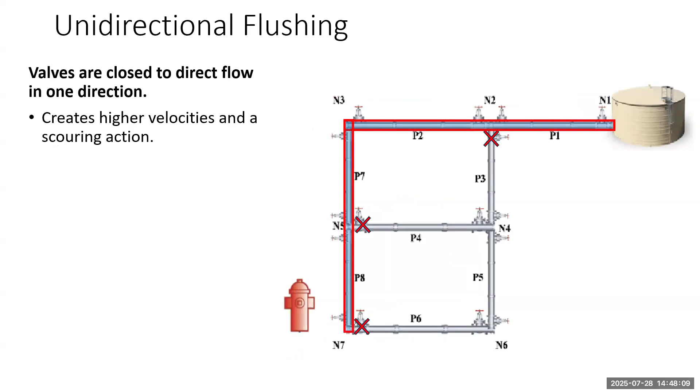We might end up just moving sediments around from place to place without really getting rid of them. Now, when we use unidirectional flushing, we're actually operating valves, and the idea is to create higher velocity so we get a scouring action. We put our hydrant in the same spot, but close some of these valves to direct the flow so it goes in the direction we want in a unidirectional fashion, so we can get maximum velocity.

We start from the source and work outward, doing one section at a time, kind of like sweeping a large building - we start at one side and systematically sweep. It's a good idea to start at a tank or a source of pressure.

Here's a comparison of just the velocity of opening a hydrant - we'd call that conventional flushing. You see the velocities when opening the hydrant at a full 1,200 gallons per minute flow, which is high, but we're only getting velocities on some lines like 1.2, 1.3 feet per second. That's not anywhere near a scouring velocity. The highest we're getting is 2.6 feet per second, which might be somewhat helpful, but the sediment is going in different directions. We're not getting efficient cleaning.

Now, if we look at unidirectional flushing, we've closed some valves, and we're getting a much higher flushing velocity. With that same 1,200 gallons per minute, we're getting 5 feet per second in this line, and it's very systematic - we're going in the same direction. All the sediment's moving the same direction, and we're getting scouring velocity. We're going to get good flushing results from this.

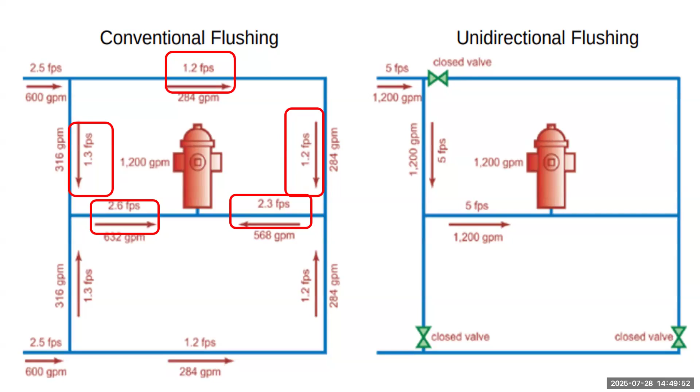You probably get, like Daryl was talking about, if there's biofilm, we're taking away that biofilm's defenses by getting rid of that EPS layer. Then when we disinfect, it's going to have a greater effect on that biofilm. You can also look at various charts. I've always just flushed a hydrant at basically its maximum flow out of the 4-inch nozzle and used unidirectional flushing until the water was clean.

But the recommendations that we were looking at earlier about biofilm removal, basically the recommended velocity is around 5 feet per second, and for about 3 pipe volumes.

And we don't want our system pressure to go down below 20 psi, because that could lead to backflow events, which we'll talk about a little bit more tomorrow. But for an 8-inch line, we need 400 gallons per minute, and we can get that minimum by just opening one 2.5-inch hydrant opening. So we don't need to open necessarily the big 4 or 4.5-inch opening. We can get that amount of flushing with just a 2.5, and that would probably be more efficient for water loss control.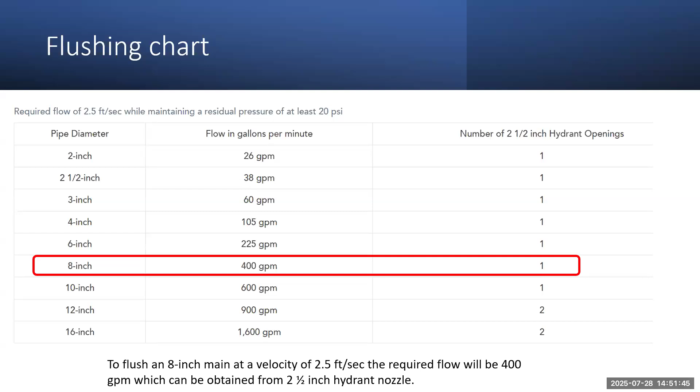Now we're going to do some flushing calculations here. It'll help us to get some insight into what we're doing when we flush. Let's say we have a 500-foot section that we want to flush. Of course, when you're doing a system-wide flushing, you're going to have several sections. But in this case, we're just looking at one 500-foot section of 6-inch water main. We want to flush it at a velocity of 5 feet per second, and we want to flush an amount equal to about 3 times the pipe volume.

So we're going to do some calculations here. We're going to see, first of all, how many total gallons are we going to use to flush this main? What should the flow be to attain the velocity? And then how much time will the actual flushing take? When we get it up to the velocity, how much time will it take to get those 3 pipe volumes through the hydrant?

So first of all, the easiest one would be to look at the volume of water flushed. We can look at this formula here: the diameter of the pipe squared times 0.785. 0.785 is a form of pi, it's 1/4 of pi. So instead of pi r squared, we're using d squared times 0.785. That's the area of a circle at the end of the pipe times the length of the pipe. Then we convert it to gallons by multiplying by 7.48 gallons per cubic foot.

Right off the bat, instead of showing this, we're going to say that the diameter in feet is 0.5 feet. We can do that in our head probably, but to calculate the diameter in feet, we take the inches of the pipe diameter and divide it by 12 inches per foot. 6 divided by 12 would be 0.5. So we're going to plug that 0.5 in. It's always a good idea to draw a picture, a diagram, when you're doing a math problem. We have this 6-inch diameter pipe, it's 500 foot long. So let's plug our numbers into that volume equation.

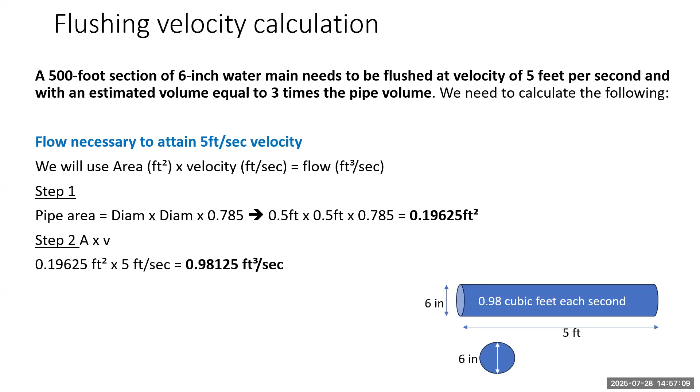So if we take the area now, we have 0.19625 in square feet, times the velocity we desire it to go at, 5 feet per second, we'll get the flow. 0.19625 times 5, I got 0.98125 cubic feet per second. I'm still not rounding off yet, just keeping the decimals so they look pretty close to what you're seeing on your calculator right now. But if we rounded that off, we'd see that it's about 1 cubic foot per second.

That's interesting, isn't it? So I drew this image over on the right. It's a 6-inch diameter pipe, 5 foot long. That's how much flow is occurring each second. It's almost like a volume formula, right? That much each second. Now, how much would it flow in a minute? Well, it would be 60 of these, right?

So we're going to convert it from CFS, cubic feet per second, to gallons per minute. That amount of flow represented by that diagram has to happen 60 times to make a minute. And each cubic foot represents 7.48 gallons. So I'm going to do that multiplication: 0.98125 cubic feet per second times 60 seconds per minute times 7.48 gallons per cubic foot gives me a flow of 440.4 gallons per minute.

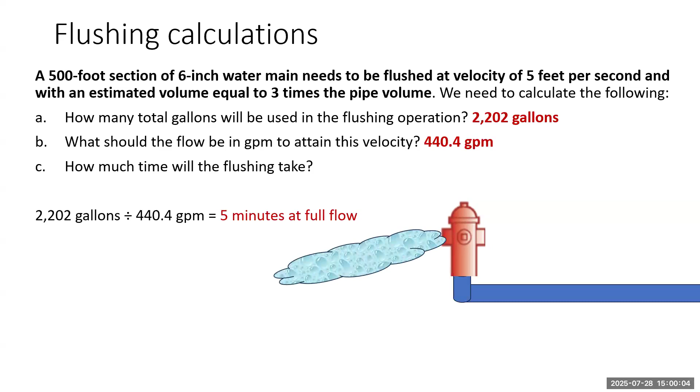There's a study that was done about the effectiveness of flushing and chlorination. They basically looked at little sections of pipe, different types of pipe, and they flushed it at a certain speed. They had these multiple valves and short sections of pipe that they could actually remove and look at. This study was called the efficacy of flushing and chlorination in removing microorganisms from pilot drinking water distribution systems. They looked at different types of pipe material and different velocities of flushing, and the effectiveness of the removal.

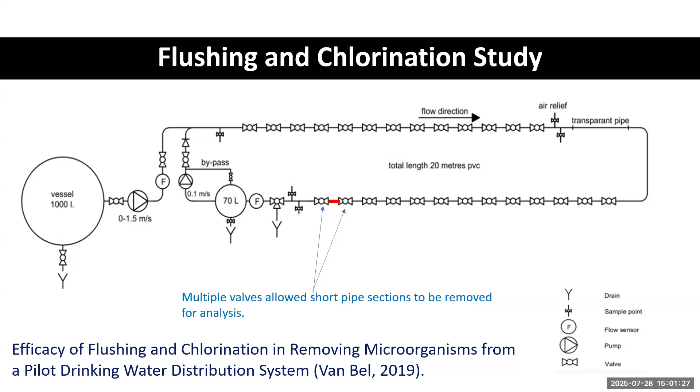Some things they found: flushing with 3 pipe volumes at a velocity of 5 feet per second removed about 1.5 to 2.7 log of microorganisms. But only a portion of the biofilm was removed.

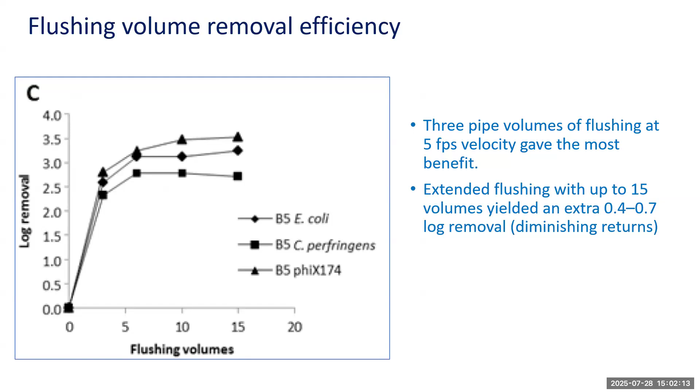They found that 3 pipe volumes at 5 feet per second gave the most benefit. They tried different things, including extending the flushing up to 15 volumes, but found there were diminishing returns in doing that. It only added a little bit more log removal of microorganisms. And remember, this is just flushing right now, without the disinfection.

So let's check here how we're understanding this. What is a recommended flushing protocol among these? And I always like to add a little bit of comedy into the polls.

And some of you are joining in with my comedy. I see, however, that about 80%...

...chose answer B, unidirectional flushing at 5 feet per second or 3 pipe volumes, and that would be correct. Answer B.

Now, main breaks and repairs are associated with contamination problems. There are various studies around the world, and there's plenty of evidence right here in the US. But this particular study was a household study in Norway, and they looked at any time there was a situation where they had a main break or even a repair, there was about 1.6 times more incidence of gastrointestinal illnesses.

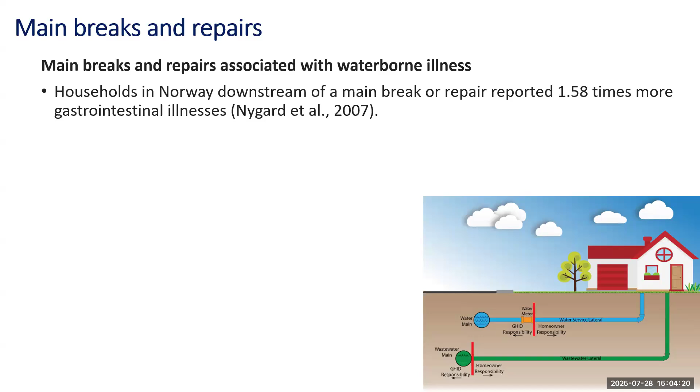They looked at Sweden also. They were about 1.9 times more likely to report some kind of acute gastrointestinal illness after a pipe break or repair in the distribution system.

There's a lot of factors that contribute to this, and a lot of it has to do with trench water, like we saw early on. Trench water has the potential to have fecal coliforms and all types of pathogens, and sometimes sewage lines are roughly at the same level as drinking water. You can have sanitary sewer overflows as well, and contaminated groundwater in the trench. There could be situations where you lose pressure when you have a main break, and it causes cross connection, backflow through cross connections.

Also, the way we make our repairs - do we use sanitary procedures? Do we disinfect all the tools and parts that we're putting together? And also, do we follow up with flushing and disinfection of the repaired main?

Those are important factors. The two most important things to maintain the integrity of the distribution system are having a continuous water pressure - if you have a loss of water pressure, it can cause contaminants to be drawn in - and the physical integrity of the distribution system.

Tomorrow, Daryl is going to be teaching about sanitary surveys, and he's going to be talking about the integrity of the distribution system, points in the distribution system. And of course, it's a larger topic, but sanitary deficiencies are points in the distribution system that can create pathways.

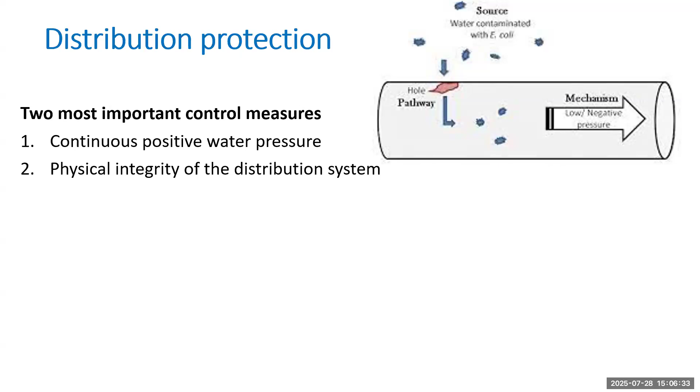But then we have a mechanism - we have a low or negative pressure, maybe caused by a main break or some type of outage that causes contaminants to be drawn into the main. It can even be a small pathway that allows something like soil bacteria to enter the distribution system. And we have chlorine there. Our chlorine residual is to provide another barrier of protection if contamination enters. The function of that chlorine residual is supposed to be inactivation of that contaminant or pathogen.

Once we use up the residual, we don't have any more disinfecting power. After we have a repair, we want to disinfect the main. There's three basic different methods. First of all, there's a method they call continuous feed - basically, they're getting a free chlorine residual of at least 25 milligrams per liter, and they're letting that sit in the main for at least a 24-hour period. You can also have a tablet method, and that is useful.

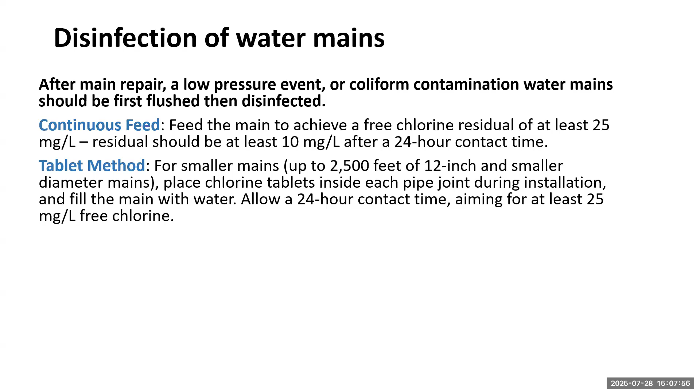An easy way to do it is to place chlorine tablets in the main at each pipe joint as you're installing a new main or making a main repair. You're aiming for a dosage of about 25 milligrams per liter.

There's also a slug method where you have a highly concentrated section of chlorinated water around 300 milligrams per liter, and you slowly push it through the main, allowing about a 3-hour contact time for each section of the main.

Any of these methods would leave a highly concentrated chlorine solution inside there, so you'd have to dechlorinate it and probably flush it to waste, making sure that no chlorinated water enters any local nearby streams or lakes. There are also some charts that can help you figure out how many tablets to use.

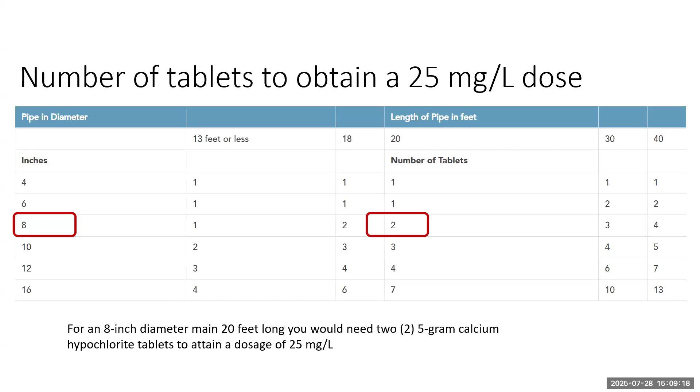Now you might want to aim for a little bit higher dose in some cases if you have a lot of chlorine demand, because you want to maintain as close as you can to the residual over the time period.

Now for tanks, normally the easiest way for large tanks is not to try to disinfect all the water in the tank, but to spray the interior of the tank with a 200 milligram per liter solution of chlorine and let it sit for 3 hours.

I've seen some methods where they do that and then just fill the tank. And I've seen other methods where they recommend rinsing the tank walls, draining out that water, dechlorinating it, and then refilling it.

After you refill, after disinfection, you want to take a bac-T sample for all these methods, whether it's a main or a tank you're disinfecting. You want to have a negative coliform result before you put it back online.

For wells, we want at least 50 milligram residual throughout a 24-hour period. I've found sometimes that a higher dose can be a little better. I used to use a little higher than this, about 250 milligram per liter when we would chlorinate our well, which is still less than 1% solution.

At least 50 milligrams, and you have to consider the chlorine demand. So you might want to actually dose a little higher than 50 milligrams per liter so that you can maintain the residual throughout the 24-hour period.

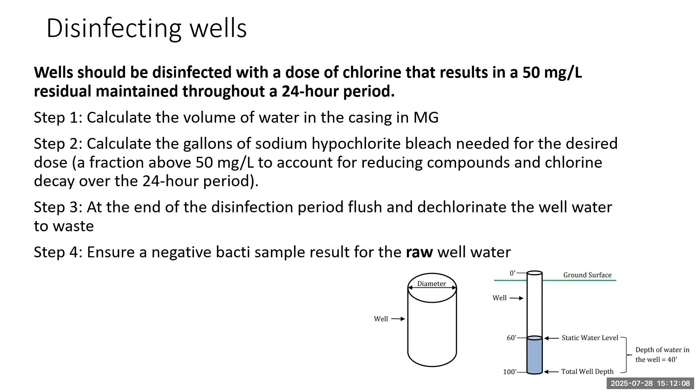Here's an example. We have a well that's 10 inches in diameter, with a total water column of 200 feet. We've already calculated the static water level to the bottom of the well is 200 feet. We're going to calculate the gallons of 12.5% bleach needed for a dose of 75 milligrams per liter.

I'm using 12.5% bleach, which would be pretty standard in the industry, and I'm going to aim for a dose a little higher than 50 because I'm thinking that some of that chlorine is going to get used up. I'm also going to use 1.2 for the specific weight of bleach.

So here's my well, 200 feet water column and 10 inches in diameter. To calculate the volume in gallons, first I need to convert the diameter to feet: 10 divided by 12 is 0.833. I'll use that diameter in my volume equation: 0.833 times 0.833 times 0.785 times 200 foot length times 7.48 gallons per cubic foot will give me the amount in gallons.

If I divide that by a million, I'll get my volume in million gallons. So it becomes 0.000815 million gallons. I've rounded it off from 814.9 to 815. To convert from gallons to million gallons, you can also just move the decimal place 6 places to the left.

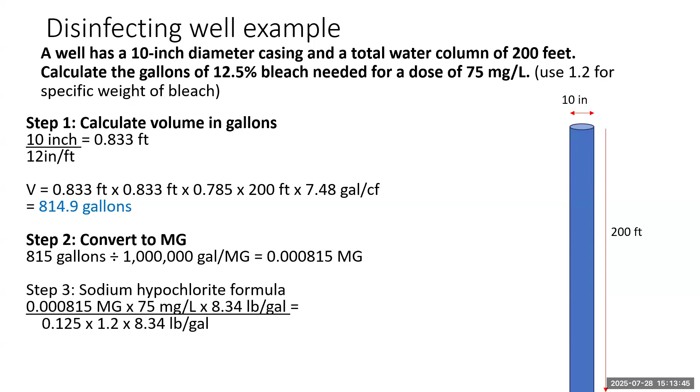Now I can plug this into my sodium hypochlorite formula. So there's my MG on the top, 0.000815, times my 75 milligram per liter dose, times 8.34 pounds per gallon. And on the bottom, I'm dividing by that percent bleach, 0.125. I've converted 12.5 to 0.125 decimal equivalent, times that 1.2 specific weight, times 8.34 pounds per gallon.

And if I calculate that out, does anyone want to try that and let me know what you get for an answer for the number of gallons? I'll give you a couple seconds here if someone wants to try that.

I also see that Tracy asked, can you chlorinate too much when you're disinfecting? Yes, you can, Tracy. There's two aspects to that. You can use more than you need, and you're just kind of wasting chlorine. But also, I've heard of people going as high as 1,000 milligrams per liter when they shock chlorinate. And what I've heard from consultants and other experts is that you can actually end up with a really high chlorine residual. You can end up oxidizing the outside layer of bacterial biofilms, and you're not really disinfecting what's underneath it.

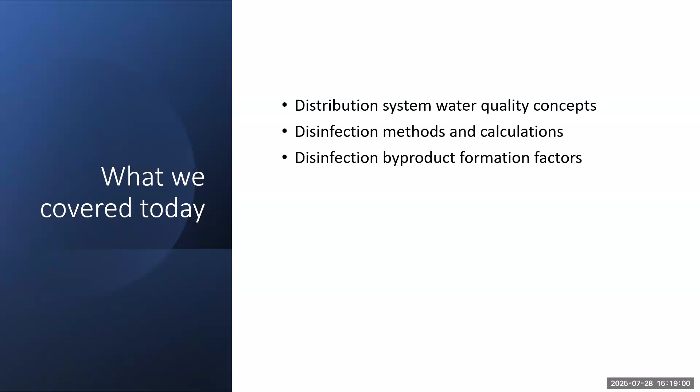First of all, we looked at overall distribution system water quality factors. We looked at disinfection methods and calculation, and disinfection byproduct formation factors. That was in that excellent presentation that Daryl gave us today. And we also looked at some various biofilm management strategies, flushing concepts and calculation, and problems with main breaks and repairs that can lead to water quality problems in the distribution system. And finally, we looked at some emergency disinfection concepts.